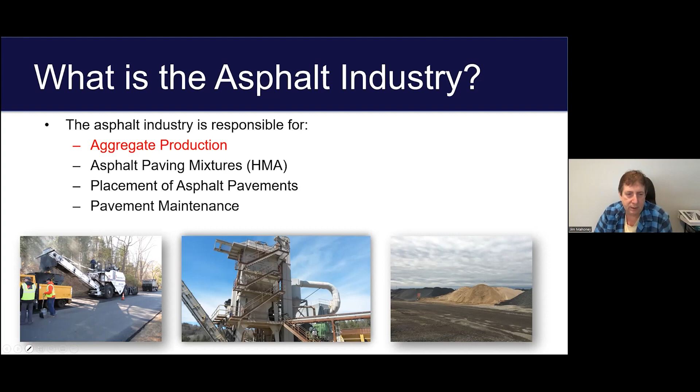When you look down on a pavement, really what you're seeing is mostly stone and some sand on the surface. When it first comes out, it's all jet black. Then as the sun bakes on that pavement, the asphalt on the very, very surface of it ages and falls off. When you look down on a pavement that's a couple years old, it looks like all rocks - that's what you're seeing, all the stone and sand that's put in there.

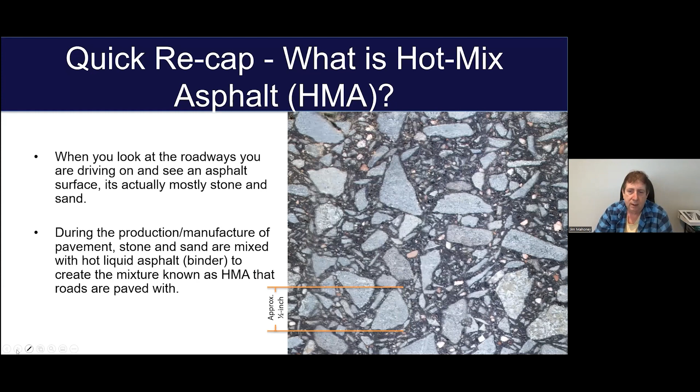That won't age anymore from ultraviolet light, because the rocks and sand block the sun from going through. So the ultraviolet light only ages the very, very top layer of it. During the actual production of this stuff, we're going to heat up the sand and the stone to dry it and heat it up, and then we're going to add the asphalt binder to it, and then pave the roads with it. That's how we get our pavement.

If you look at things by weight, the pavement consists of about 95% sand and stone, and 5% of it is the black asphalt liquid binder.

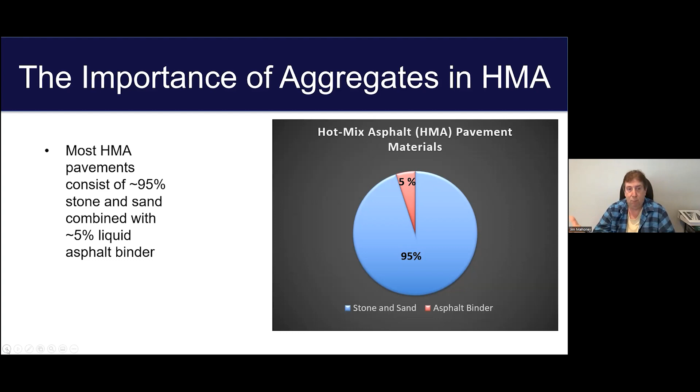The aggregate plays a big part in how the material is going to behave, because as that material is out there, it's essentially 95% sand and stone. So that has a huge impact.

One thing a QC technician does a lot is make sure we have what's called a gradation when we analyze an aggregate to see what sizes are in there. We're looking at the spread of different sizes.

If I just give you all large pieces and tell you to pack them tightly together with no smaller pieces to fit between, we end up with a lot of void space, a lot of empty space where the aggregates just don't lock. There's nothing to fill in those spaces.

So when we make our pavements, we want the right size proportions of all the different material and sizes, so that the larger pieces fit together and the smaller pieces fit inside those void spaces, all the way down through, so we can minimize a lot of the void space.

Over the years we've also learned a lot about the aggregates we use, and we need to make sure we have the right sizes and proportions to resist damage from the actual production. The aggregates need to be strong enough and the right size so they can withstand all the bangs.

There's a lot of beating that goes on with our aggregates until it's actually down in the roadway and compacting, because we have 10-ton rollers beating on it. We've got all kinds of different opportunities for the aggregates to degrade.

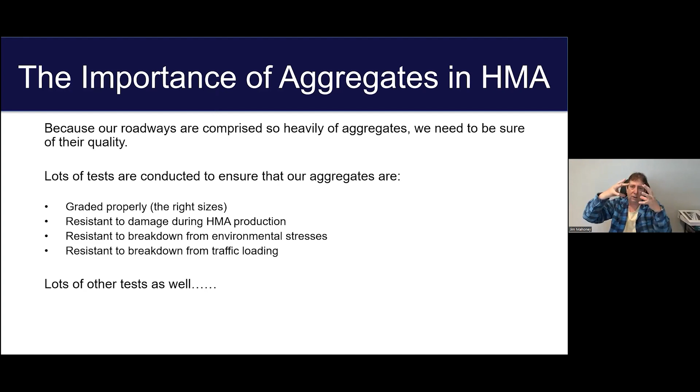We also need to make sure they're not susceptible to freeze-thaw damage, because water gets in there and likes to break the aggregate apart. It goes into the aggregate, freezes, and swells, pushing everything apart and breaking the aggregates.

It's just like if you lose the heat in your house and it's cold outside, the pipes will freeze and burst. They burst because water gets trapped in those pipes, and when it freezes it expands and pops the pipes apart. That's why you get broken pipes when it's really cold outside.

A similar thing happens inside aggregates in a pavement. We need to make sure they're strong enough that they won't break apart. We look at rocks and think they're hard, they must be strong enough, but there are a lot of rocks out there that can't withstand that kind of distress.

We also want to make sure that as we load this with traffic, the aggregates themselves aren't going to break down. So aggregates have a lot to do, and there are a lot of tests involved in checking them. Because of time constraints we can't go into all of them, but we'll talk about them a little bit.

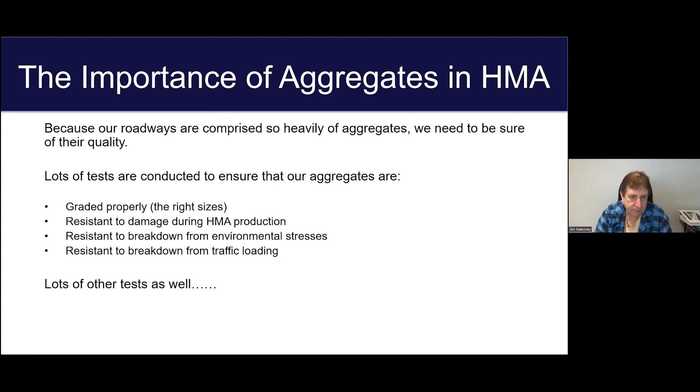Now we have to look at the different types of aggregates we have. We have natural aggregates - these are the ones Mother Nature deposited for us, mostly when the glaciers retreated. They're dug up from the earth, from quarries and pits, which have a lot of different names. Because they were deposited by the glaciers when they retreated 10,000 years ago, these aggregates were deposited in water.

So when things are deposited in water, they tend to tumble, and when they tumble, they tend to become more rounded. As they become more rounded, they can't support as much load.

It's like if you've been to the beach, standing on the dry sand, and you try to run - the sand just rolls out from underneath your feet when you push off. Whereas on a walking path with more angular material, when you push off it doesn't slide out from underneath your feet, so it's a lot easier to push off of.

That's why we use natural aggregates, but not a lot of them in our pavements, because we like things to lock together - the more they're locked together, the easier it is for them to support load when you have traffic on it, so it doesn't just push out of the way.

So you may hear the term bank run. That means they're just natural aggregates. We have a lot of natural aggregates around, but we can't access them nearly as much as we used to, because we built on them. If you just built your dream house and somebody wants to open up a quarry right next to your house, you're not going to be happy with that. So we shifted and we use a lot more manufactured aggregates.

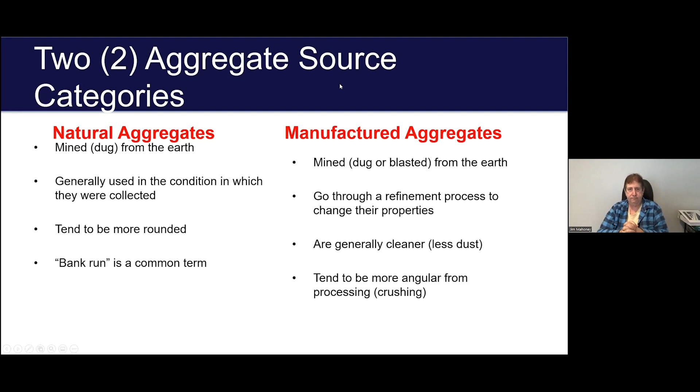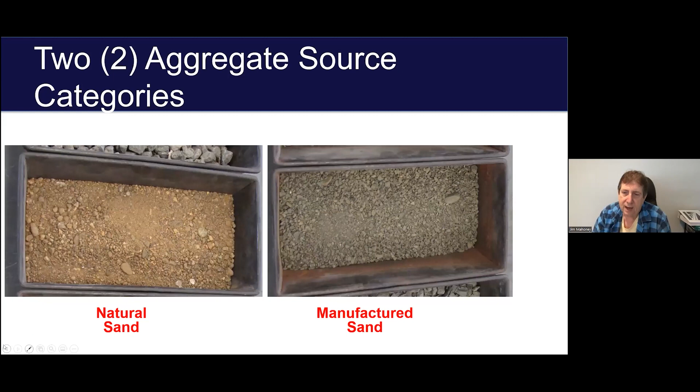These are two sands as well. The one on the left is a natural sand, and if you look at those particles, they tend to have more rounded edges. If you were to walk barefoot across the one on the left, there might be one or two things that make the bottom of your feet hurt. But the one on the right, this is a manufactured sand, coming out of the crushing process. If you walk barefoot through that, that's going to hurt, because that stuff is much more angular, like little pinpricks on the bottom of your feet.

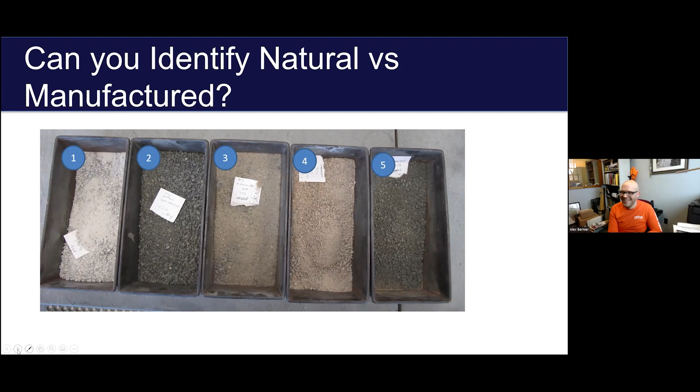Number 1 is a natural sand as well. Again, I have that home field advantage—I saw these things once in person, so it makes it a little easier. Definitely. Okay, go ahead, Alex.

And then we have to talk about how we're going to sample these materials, because if we don't do a good job sampling our aggregates when we go to test them, they don't represent what's out there. And if it doesn't represent what's out there, you're kind of wasting your time. So you want to make sure that when we sample these things, we do it correctly. There is a process to try to minimize any influence we may have by accident in making sure that material is going to represent what's out there.

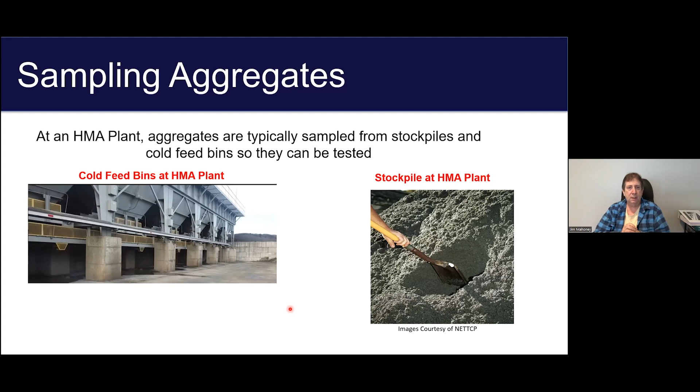Jim overviewed all the different types of testing we're going to be doing on aggregate to determine whether or not we can even use it to make mix with. And we're going to get into the details of how you actually calculate a gradation. The way we describe aggregate is by the size of the particles in it, all the different sizes, but then because we're characterizing all the different sizes, we have to figure them into percents. So it's a very repetitive process.

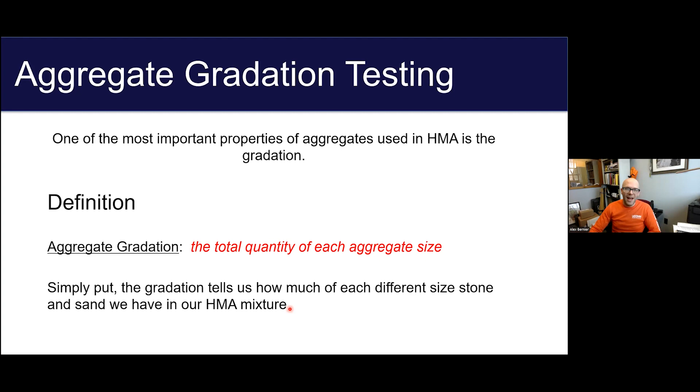Don't be alarmed by the math we're about to show you. Once you have the hang of it, you just do it over and over and over and over again. And for someone who's actually running these daily in a plant environment or in a quarry, there are spreadsheets available and forms that get filled out automatically by those spreadsheets. But it is important to know the fundamentals, and that's why we go through it step by step here. Is there anything else I want to say on this slide? No, I don't think so.

All right. The gradation, as Jim mentioned earlier, is also called a sieve analysis. And when we use the term sieve, for anyone who's spent considerable time in a sandbox like I did as a child, you've probably played with something that is technically a sieve. But these are much more scientific instruments when we're using them for design of roadways.

So sieves are containers that have openings of specific sizes to separate fractions, which are the percents or a portion of the whole sample, so we can then weigh them individually. And you can see in this picture, there's larger openings here versus there are openings on this. It's smaller than the screens on your windows at your house.

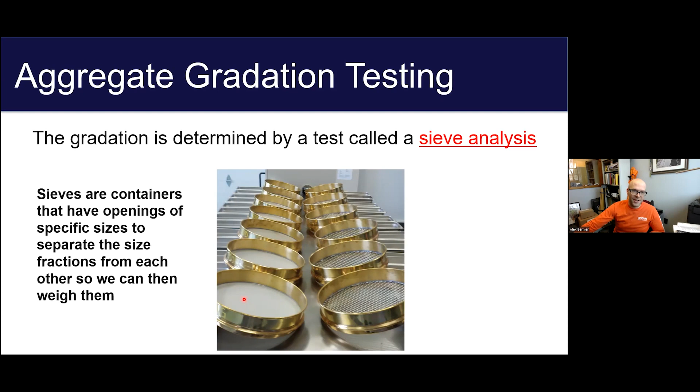So we'll take these sieves and we stack them, putting the largest opening on the top, smallest opening on the bottom, and we finish every sieve stack with a pan. If you don't put a pan in, you make a big mess and you actually ruin your sample. The reason being is when we start and stop this test, when we're done, we want to make sure we have pretty much the same amount of material. Otherwise, we would have lost it somewhere along the way and the test is also invalid.

So we're talking about when we say sieve sizes, for the larger stuff, we're going to describe it by the actual measurement, like a 1/2 inch, a 3/8. But once we start getting smaller, because of the diameter of the wire, we then start just saying the number of openings per inch. So we've got like a number 4 sieve and a number 8. And a number 4 sieve is close to a 1/4 inch, but it's actually not because of the diameter of the wire in that grid.

And you'll see a quick video in a couple slides showing you a little clearer some of the opening sizes, but we go all the way down to 200 openings per inch, which is very, very small. It's the smallest we can mechanically separate aggregate particles of sand and stone from themselves. And one of the challenges at that really small size is static electricity can actually hold those small pieces onto the larger stuff. So even though we have this test that we can run, there are some blind spots to it too that we as users of the test have to be aware of.

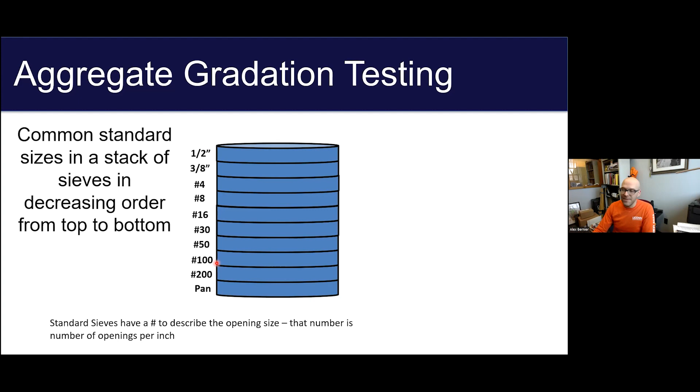With aggregate testing, most of what you do is wetting and drying aggregate, and it's pretty funny. But to start this test, we're going to dry it out. So we've got what's called a forced draft oven in most of these laboratories, and this is a large oven. Like I could get in there. It's pretty big.

And so we've got multiple racks and we put our samples in there. We're going to dry them to a constant mass, meaning the moisture, there's no more moisture in it. So we set the oven slightly above boiling temperature, 230 degrees Fahrenheit or 110 degrees Celsius, right? We don't need it to be 400 degrees. We're just trying to drive the moisture out.

The hotter it goes, the more likely we might break down an aggregate. Hopefully our aggregate's strong enough, but we assume the worst, right? We don't know about the sample necessarily before we get it, and sometimes we're testing old material that we're doing forensic testing on.

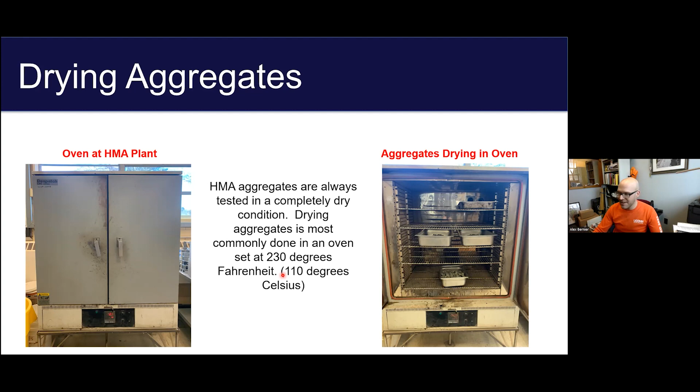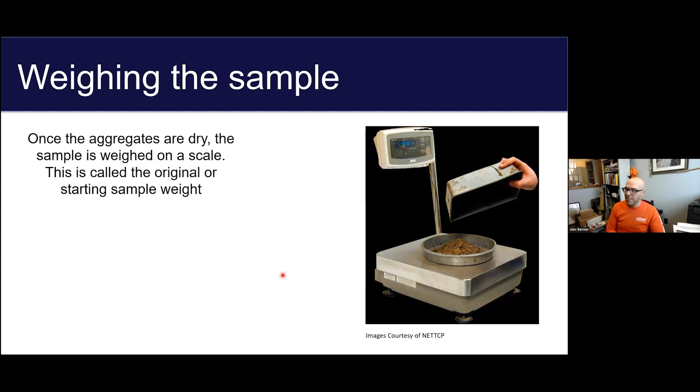Once that aggregate's dry, we're going to weigh it. That's a pretty straightforward step. We put it on a scale. Most labs now have digital scales, so you set your sample in a bowl that has been tared, meaning the weight of the bowl is either accounted for by you or it's been zeroed out in the scale. You pour your sample in there and you can weigh it. We're going to record that as our starting mass.

We then insert the sample through the top of our stack of sieves, and you're going to hear it start trickling down through. But we need to agitate it more to make sure every single particle has made its way down as far as it can go, right? This is basically a method of refusing these shapes to go any further, and the smaller they are, the further they make it. Some of them go all the way down to the pan.

Material that's finer than 200, we consider that to be silt and clay or dust. It's not just silt and clay, but silt and clay, which are problematic types of materials for us in construction, are finer than 200.

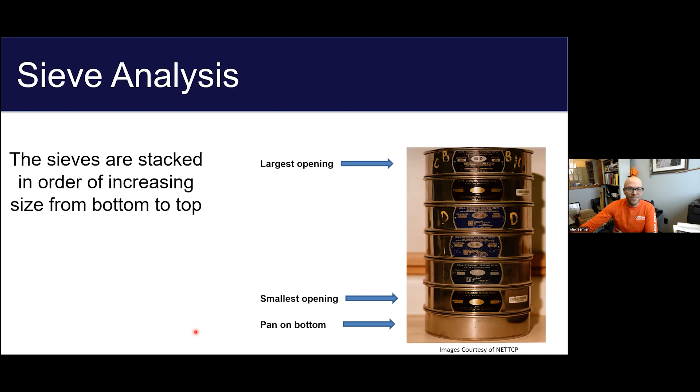I got a step ahead of me. So we dump the sample into the top, and then what's going on here?

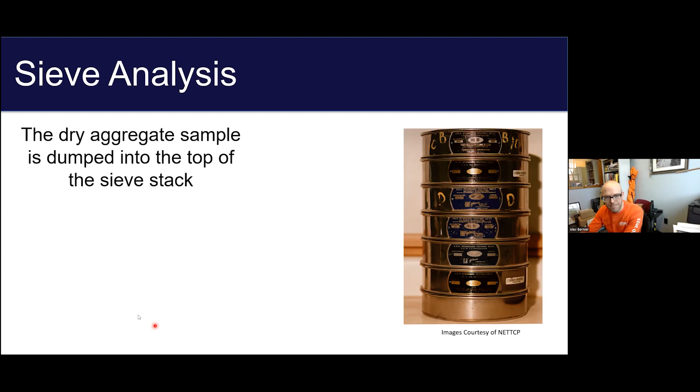Oh, geez. It's trying to buffer this video.

So once the sample's in, we have to agitate it. You actually can manually shake these by hand. It's very tedious, and if that was your job all day, it would not be great. So fortunately, we have machines that can help us with this.

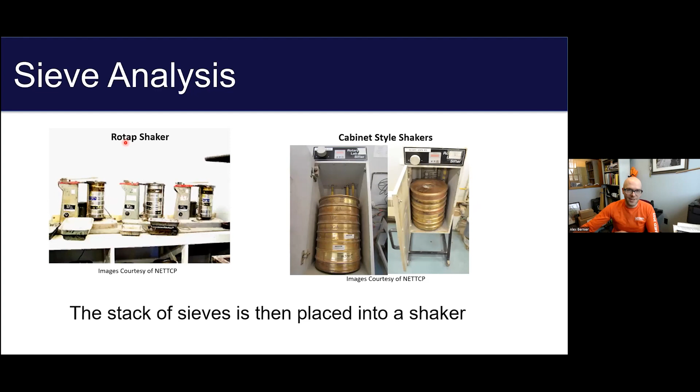The first is called a Rotap, and the other is a cabinet style shaker. Basically, you take your stack of sieves, put it in there, and it's actually going to shake it, rotate it, knock it with a hammer or like a paddle in the case of the Rotap. We're going to show you a video of a cabinet style shaker. That's probably the most common type these days, but the Rotap was the original mechanical shaker of these sieves.

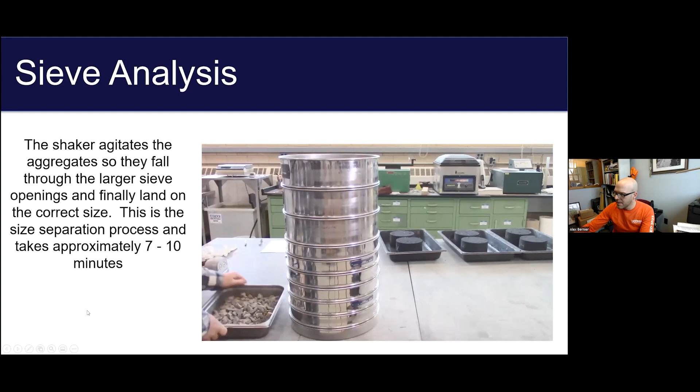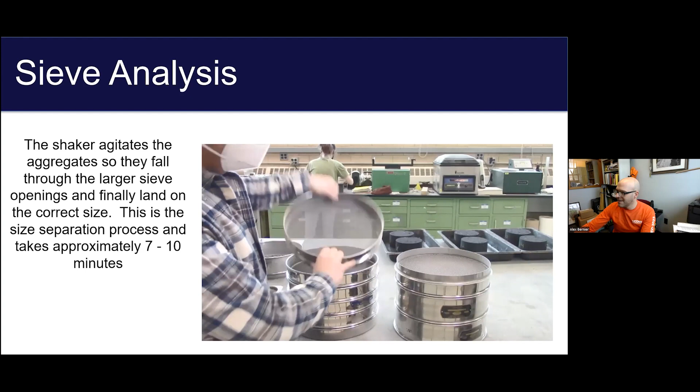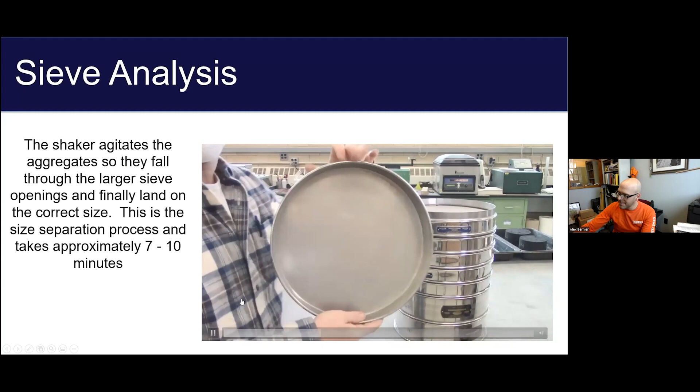Here's a quick video showing you loading a sample in, and I'm going to show you different sizes of these sieves. Got a sample of aggregate, large opening, smaller, and they just get progressively smaller. Finally, the pan, nothing's going to pass through that.

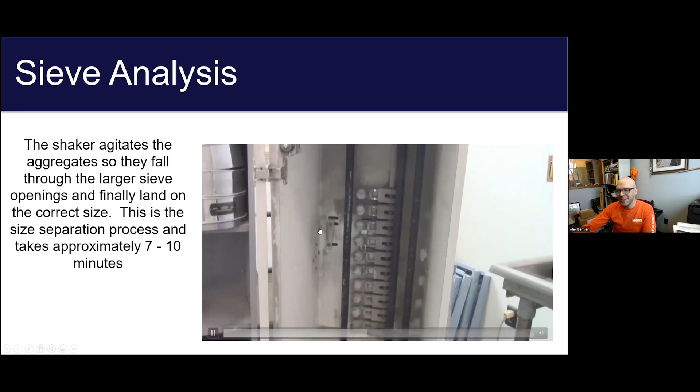So they were opposite, right? I tipped them up so the largest opening is now at the top. I didn't show putting a lid on there, but hopefully you'll see the lid here when I put it into the cabinet. Those fingers that you saw before we put the sample in, oh yeah, you can see one now. They're actually kind of tapping it as it rotates. It's fairly loud, which is why it has the cabinet. We actually have a separate room where we do all of our noisy things, that this happens in.

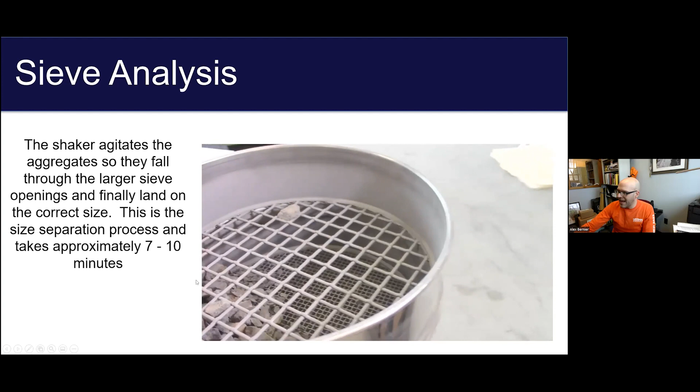It's going to run for 7 to 10 minutes until a term called sieving thoroughness has been achieved. At that point, you then need to look at each screen, and we're going to weigh the particles individually on these screens. You can see different amounts of material have been left, right? Every sample is going to be slightly different.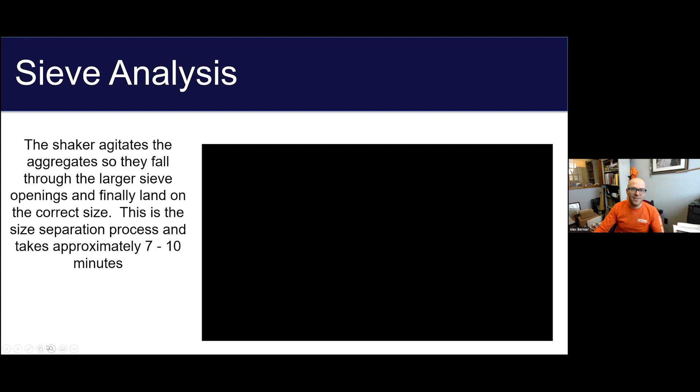In the case of hot mix pavements, we want our samples to be pretty much the same. There's an allowable difference because it is a natural material. It's going to have variability in it, but the question is how much is too much? And we've written that out in specifications as a community, right, as engineers and users of aggregate in the world.

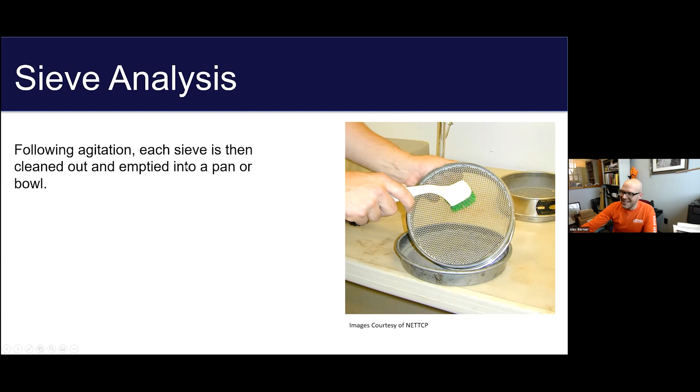So following that agitation, each sieve is cleaned out, as I mentioned, and we're going to weigh it in a pan.

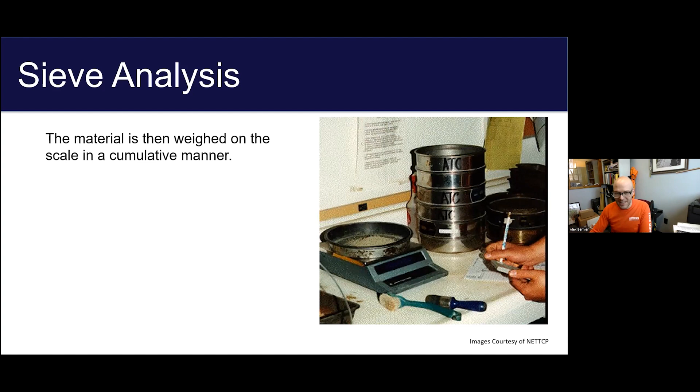What we're going to teach you, there are a couple different ways to do this. You could weigh each sieve individually, or you can do it cumulatively. By cumulatively, we mean you tare a bowl, you put your largest particles in, write that number down, then you put the next smaller sieve in, you weigh that, and you're adding into the bowl each time. That's called cumulative. We're going to teach you that method because it's a slightly more straightforward math.

Cumulative weighing means that the weight retained for each sieve includes all the aggregate on that sieve and the sieves above it. So the idea here is if you've got a 3/8 inch screen, the opening is 3/8 of an inch, all the material that was retained on the 1/2 inch screen above it would also be retained on the 3/8. That's why this makes sense.

If the 200, which is the smallest sieve, if you only had a 200 sieve and you put your sample on that, you would damage the screen, but also everything above the 200 sieve would not go through it. So that's why this cumulative analysis works that way.

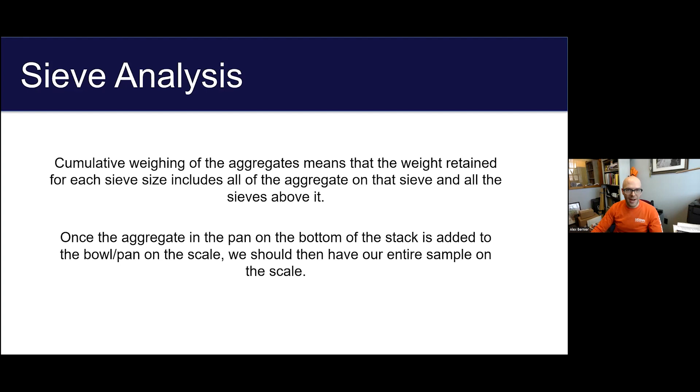Once the aggregate in the pan on the bottom of the stack is added, it should equal the weight of the initial sample, plus or minus a couple grams. There's always a little bit of dust making its way out, and the dustier your sample is, the more likely particles are going to go airborne, and you might lose a gram or two.

So in that 3/8 inch sieve, I see 0 stones, 0 weight was retained. On the number 4, we had 96.8 grams. So as someone who works with this a lot, I can tell you we're looking at a sand because there's not a lot of large particles, nothing significantly larger than a number 4.

And the thing is, all this keeps adding up down to 830. So we don't have 830 grams of dust, that was our sample size. We should have mentioned that 830 plus or minus was our original sample size. But so that is the data we get from the lab.

We now have to do some calculations to figure out the percents, like I mentioned. The percent gives us just a more general understanding of the particle distribution. Looking at the weights, you kind of have to do the math out on your own. So that's why we do this math.

Here's an example of the percent calculation we're going to do. For that number 4 sieve, if you remember, there was 96.8 grams, and we had a total of 830 grams. So we're just calculating a percent here, and I'll pull up a calculator so I can show you that the math on the screen is valid. So we've got our 96.8, and we're dividing it by 830.

You can do 0.0 if you want, if you've got 0 as a decimal, you can take it or leave it when you're punching it into a calculator. And we're getting 0.11662650, on and on and on. When we're talking about percents, we report everything to the nearest 1/10 of a percent.

So in this case, we're going to multiply that by 100, which is just moving that decimal place. We had 0.116626. We just moved the decimal over 2 places by multiplying it by 100, which gives us our actual percent. So we have 11.66%. And if you remember, oh, it's weird because that's not in the PowerPoint.

My laser pointer shuts off. Hopefully you can see the pointer on my... Yep, we can.

Yeah, cool. So if we're rounding to the 10th, we only look at the decimal place one to the right of it to round. We don't care what's happening over here. So we're looking at this number to see about rounding this one. And if it's 5 or up, we round up, if it's less than 5, we round down. Here we have 6, we're going to round that up to 7. That's where the 0.117 came from.

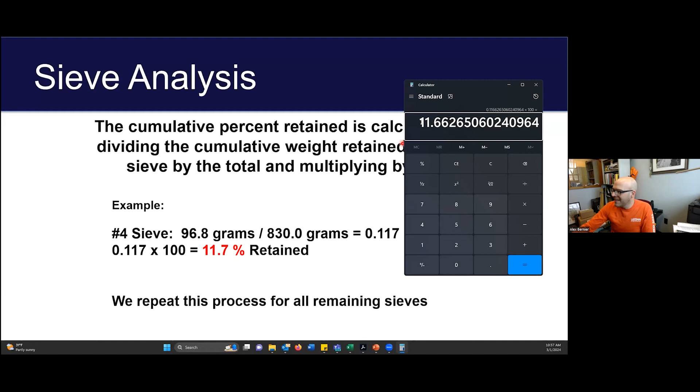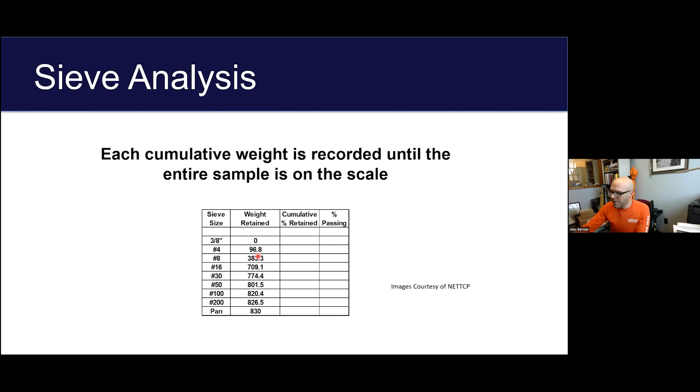We rounded it already in this example. So our answer then is 11.7% for this one sieve. Now we're just going to do this math. We go back here, that was 96.8, right, that's 11%. We're going to do this math over and over until we get to the bottom.

So when we do that out, we're looking at 11.7, 46.2, 85.4, and that's just this number divided by the total, 830. A good check on that is at the pan, 830 divided by 830 is 1, and that's 100%. In practice, this might be 99.9, and that's probably going to be okay. You can look at your specs to see what the allowable variation is there, the allowable loss, but that should be as close to your original sample size as possible.

In the case of the difference between the number 200 and the pan, this sample actually has very little dust, 0.4%. That's not a lot. That's good. So that is our first column of math that we filled in here, cumulative percent retained.

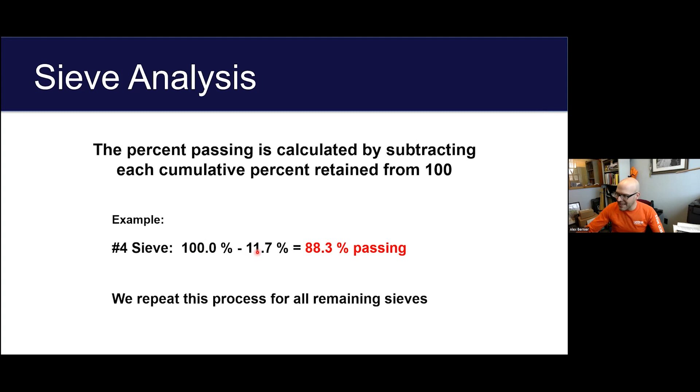We also describe these aggregates as percent passing. The nice thing about cumulative percent retained and percent passing is they're opposites, meaning 100% minus one is the other. So if we know one, we can get to the other just by subtracting it from 100. So we just calculated the cumulative percent retained. To go to the other, which happens to be percent passing, we're just going to do 100 minus the answer we calculated for each of these columns: 100 minus 11.7, 100 minus 46.2, 100 minus 85.4, and so on.

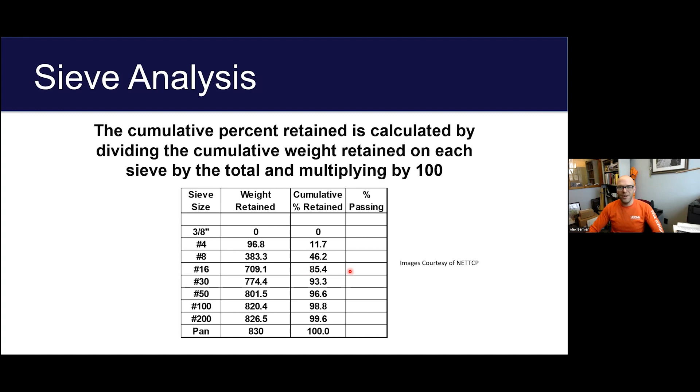Now, if this weren't cumulative, if this were individual sieves retained, there'd be an extra step in between to get to percent passing. So you have to make sure you're actually looking at cumulative percent retained, which in our class here we'll always be discussing that way, but it is worth being aware of that.

So here, the opposite, where we have 100% retained in the pan, that makes sense - the pan should catch our entire sample. Here we have 0% weight on the 3/8 sieve. That means 100% of our sample makes its way through there. So those are good conceptual checks on what's actually happening with this test.

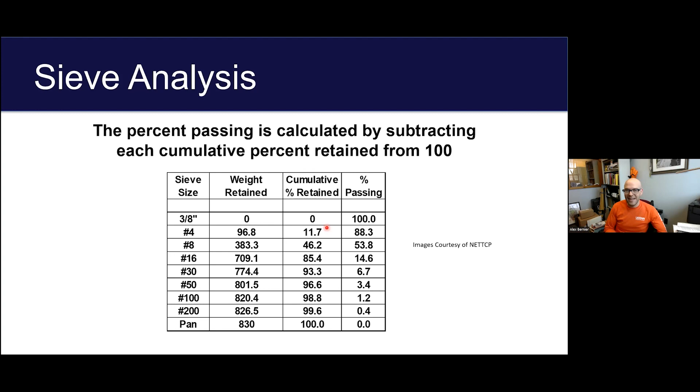This math, I don't know how you feel about math, but if it seems easy, that's a good thing. It's not meant to be exceptionally challenging, but the crazy thing is how important this type of test is for our built environment. So taking this type of test seriously and taking your time on it is really important. That's why we're going to be practicing it. I think there are a couple questions in the quiz that go over some math here.

The proper gradation ensures that the compacted mixture is going to resist traffic damage. It's going to ensure we have proper coating of asphalt. If our asphalt content stays the same but the gradation is changing, we're either going to have too much asphalt and cause a phenomenon known as bleeding, where the asphalt makes its way to the surface and reduces friction, becomes unsafe for the traveling public, or we don't have enough asphalt and particles are uncoated and the pavement breaks down quickly. So it's really kind of a sweet spot here that we have to be monitoring.

The gradations are checked multiple times per day on stockpiles, cold feed bins, and we're going to get into hot bins when we talk about plant production - they're checked there as well. The results of that gradation are used to make adjustments at the plant and monitor the quality of the mix. It's indicative of all of the quality. And for people working in the field, if our gradation is changing in a stockpile, there's no way they can be expected to get density and quality pavements when we're talking about placing it in the field.

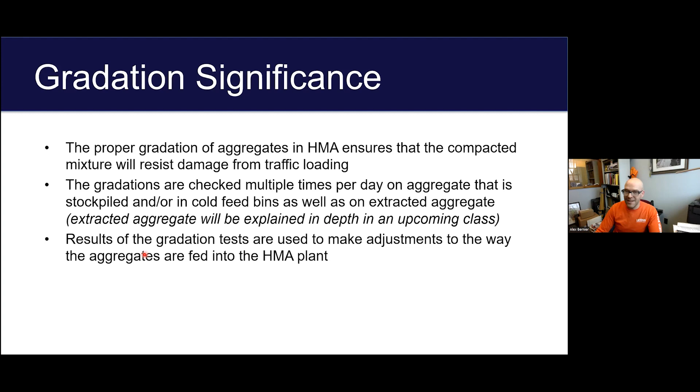Jim mentioned earlier, recycled pavement - we recycle almost 100% of it. And there's a statistic, I should probably find a source for this, but a long time ago I heard that asphalt is the number one recycled material in our country by weight because it's rocks, it's pretty heavy. We might recycle more plastic, maybe - plastic's a really controversial recycler, but it's not as heavy as rocks. So we get most recycled material in the country by weight.

The way we recycle it primarily is by reincorporating it at a mix facility. We're talking about traditionally 15 to 20% of mixes going out of plants being blended with that RAP. RAP is going to save money, it's going to help the environment, it's going to reduce costs and impact.

Virgin is the terminology - so we're talking about materials that have come out of a quarry where we're taking it from the earth. So RAP is going to offset that. And it needs to be produced and managed properly, though. Looking at this gradation, if you go out and mill a roadway, what is the gradation in that roadway and how many layers are we milling through? And do those layers change all the time?

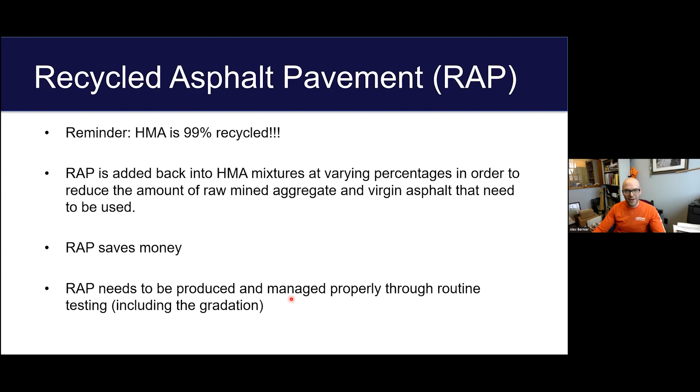So there's additional processing that goes on with RAP before it gets recycled, just crushing it down and making sure it's uniform before we end up mixing it back in, so we can monitor and maintain the uniformity of the pavement better. So this is primarily how we get RAP.

You've probably driven past one of these on a road or two. This is a cold milling machine. What we're talking about here, the money-making operation, is down in the belly between these tracks. It's a mandrel head with diamond impregnated tips that's actually going to crush up the road, or pulverize is a better term, as it travels over the road.

These machines are really cool to be around. They're very impressive. Most of them have two engines, one to propel it and one to power the head, because it requires so much power to spin that head as it's grinding into the pavement. These can technically grind 4 to 8 inches deep, and it's going to go slower the deeper you go. It's typically grinding about 2 inches off of a road as it travels.

And then each of these tracks, which if anyone's watched the original Star Wars, reminds me of the machine in A New Hope with those big tracks. But the point I was getting at is each of those can be adjusted individually, so you can actually change the grade, or improve the grade and the cross slope of your road, with these milling machines.

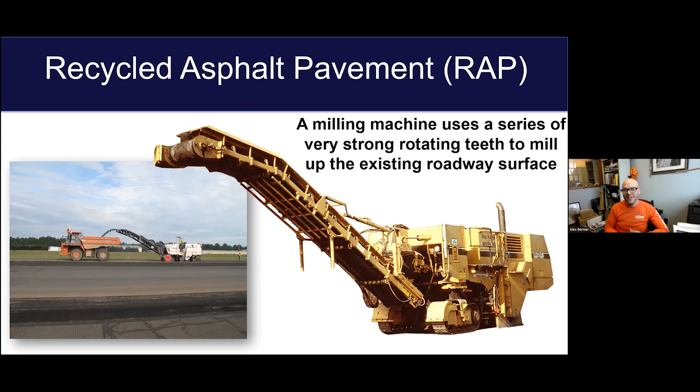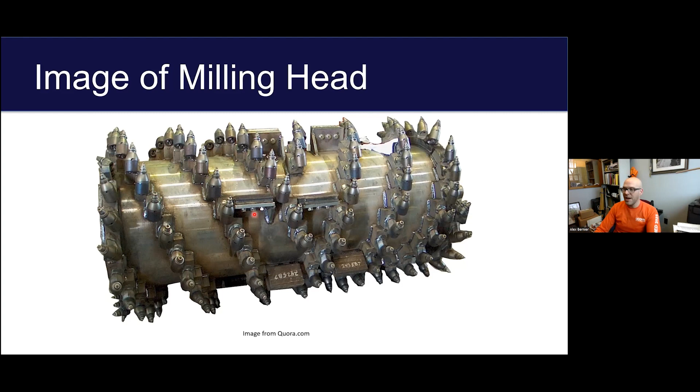This is a close-up of one of the heads, so you can see all these teeth. They're replaceable. After a long day of milling, someone actually has to go under that machine and inspect and replace these, make sure they're all in good working order. And if they wear out, you actually see a deficient product.

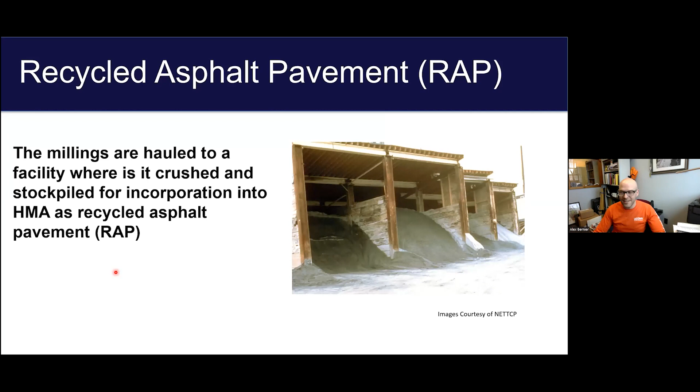The millings get hauled to a paving facility where they're going to be stockpiled and then reincorporated. As I mentioned, they're often crushed or separated into certain aggregate sizes again, to make sure it's easier to get pavement produced more uniformly.

So does anyone have any questions on that? I think we wrapped up a little earlier than last time, but we can do a couple more math examples if people feel like they need to.

I have a question, and I may have missed it because they did step out, but do you guys have a formula for the kids to follow to do those calculations? A step-by-step kind of thing? I might be asking something they probably already know. No worries, I think we have a schematic that shows it. I will track that down and Erin can send it out later on. That sounds perfect, thank you. Just so they can practice.

The quiz is right, Jim. I haven't actually checked the quiz myself, but I believe there are some practice problems in the quiz. Yep, there are some practice problems on the quiz. I was going to share that and do one of the first calculations with them if people have time.